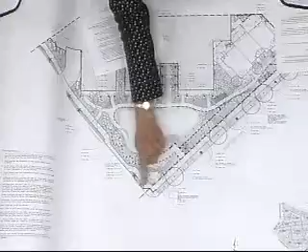I'll address a couple of the comments in my explanation. This is the new stone wall with the commemorative plaques along it, as you saw previously. We've taken off two plaques at the end. We've created two 18-inch high stone raised planters at either end and one at the corner, which allows this connection to slope up at a maximum 4.99%, so we don't need any handrails to connect. If someone wanted to cut across, they could, or they could come in and view the plaques from either side. We've put a Valencia orange in each one with star jasmine as ground cover underneath. In this one we just have the ground cover planting below. We can't have anything tall because transportation wants a 30-inch max viewing across there, but in the middle we have a location for a statue of St. Francis on a stone plinth.

So I think that covers number 2, number 4, number 5, and number 3 under landscaping. We have 2 trees instead of 1, which is the 2 orange trees. It seemed like it wanted to be balanced; just sticking one tree in the middle seemed forced. Number 3 is okay. So that's 2, 3, and 4 covered in that. Number 5 is addressed there too.

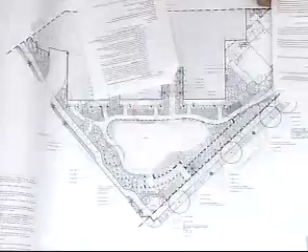We basically further refined the commemorative plaque area, added the statue, and had to get rid of 2 plaque areas, but we feel we can supplement that with text on the plaques when it goes to landmarks. The other thing I should mention is the paving in there is shown as flagstone, and the intent is to salvage flagstone from the demo of the St. Francis Gardens and put it in. We're not doing the concrete with grooves between anymore. This is noted in those little tiny sets on the hardscape sheets.

So that's number 5. Number 6, update the lighting plan to reflect the changes to the project. Go to the architectural sheets. If you look at the legend, I have two symbols for lights: this is a light pole, and this is a path or step light.

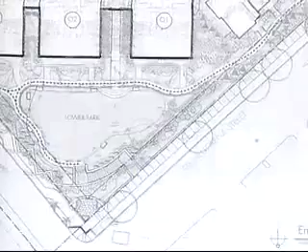If that light's shown on a step, it would be a step light. If it's shown on the path, it'd be a path light. And they're shown strewn across the major public walkways throughout the site. The intent is clear.

They're basically about 8 feet on center along each of the major pathway areas. They're not shown in these villa areas because those are shown on those particular drawings as lights in the sides of the planters. I can go to those sheets and pull those out if you like, but that's been addressed previously.

So you're showing really the main paths going all the way up. I see them here. You won't see them here because this is part of this building permit, but you'll see it along here, along this step here. We have pole lights along this internal street, lighting along this path all the way across here, all the way along here, up around here, and then along this playground area, down the stairs, the center stair.

I previously submitted the information two weeks ago. Do we still have that? You looked at it and liked it. There's the flush one that just...

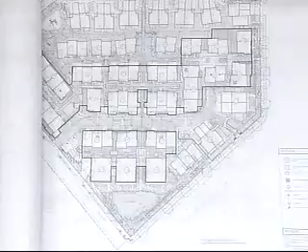I just had a quick question. Are there any pole lights at the entrances, or the major entrances to each part of the site? In other words, this would be one key point here. So you don't have any at this point? I'm not proposing any major street lights at the entrances. Not a street light, but say like a pedestrian lamp.

Let's not go into questions before the presentation is finished. Yeah, I'm just trying to understand the whole thing. There will be some other questions that we could ask after too.

There are some additional street lights shown for the off-site improvements that were required as part of our conditions of approval. I can't recall where those exactly are, but we can pull those drawings out.

Number 7, consider the addition of a bench in the former gazebo area. That was done last week, shown on the landscape plan. It's shown on our plan as well. You put it on your plan? I brought in your plan, so it's right here. So that's the bench.

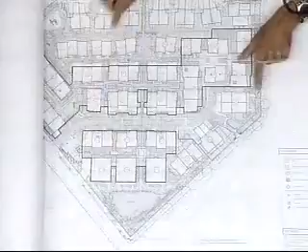Number 8, staff is to clarify the bus stop requirement condition. AMRA did clarify that and said that those shuttle stops needed to be covered. So we've shown a covered shuttle stop here at shuttle stop number 2, and a covered shuttle stop here, shuttle stop number 1. On the upper site, we incorporated this shuttle stop into the carport area. So we added a handicap spot, and we're making that an extra wide handicap spot that's covered with a bench and an area for wheelchair access for waiting for the shuttle. Do we have a design for the cover? Yes.

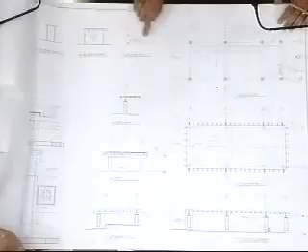The cover is just a simple trellis structure with a 6x6 post and 6x10 beams and a flat tongue-and-groove 2x6 roof with room for one bench and then a clear space for ADA. And then this is the extra width on this carport that you've seen before. That's the bench there.

On the landscaping, I'll let you address those, Katie. On the site improvement set, the plant list, all of the Stenocarpus trees, including the 5 on the street, have been increased to 24-inch box size.

Number 2, introduce low group plantings among the existing ground cover. We have shown that on those 2 sheets along Micheltorena as requested. However, I've spoken with someone at the Streets Committee who says he does not think that will be approved by Parks. They want a monoculture planting in all of the parkways now, and there's a list of about 11 plants that they will accept. The Cotoneaster ground cover that we have specified is on that list. But I've shown them anyway, so we'll take it to the Streets Committee and the Parks Department when they select the street tree, because they haven't done that yet for those 2 streets. At that time, they'll review it, and if they approve it, good, and if they don't, we'll just go back to the plain Cotoneaster.

And then the other one was to study the planting in the corner visitor area to be more historic in nature, and that's where we've added the citrus trees and the low star jasmine as a ground cover.

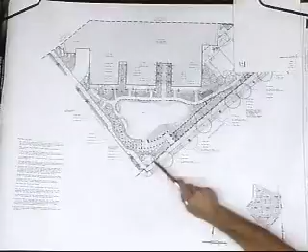So I heard that these planters are 18 inches. What was the height of this? The wall is 42 inches high. So it's 42 inches from here all the way around to here, and then that piece returns at 18 inches? Yes.

That question was asked. I had another question. Given that some of this work is in the front setback, is any of this work requiring modifications? Not that I'm aware of. It's considered county site work and not?

Site work. And what about the bus shelters? The bus shuttles are previously approved. Those locations are previously approved. Okay, so they don't need a modification either.

No. And did you have a design for the shelter, the smaller shelters that are up here? Did I miss it? Because I thought that was the one I showed, the smaller shelter, it was, and the other one was incorporated into the carport. Okay, got it.

No, that was it for my questions. Thanks, Clay. Gary?

Did you study the idea of maybe putting the statue up right outside of the setback? Irma called me at 2 o'clock today and told me the issue with the statue. Okay, fair enough. No. I'm more than happy to consider other options if the board strongly feels that we need a statue.

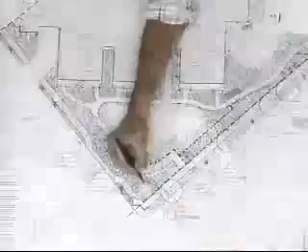And we can put it in an area that's not within the setback. We could put it just behind the main plaque, if you look at my site plan, that area is just outside the setback. That's the only area that's just outside the setback. I prefer the location we had it previously, but it's a 30-inch high statue that's a nod.

Okay. That's it. Keith? No questions. Okay, Clay, go ahead. Question for staff, just to refresh my memory and maybe the memories of other people.

What exactly is recorded as a motion or approval or condition of approval with regards to the statue? Sorry, I had it with me. That's right, okay, now. Oh, here it is.

The condition of approval reads: a commemorative display or area for the education of the public detailing the history of the St. Francis Hospital shall be integrated within the open space located at the corner of Micheltorena and Salsipuedes streets. All text for the display shall be written by a city qualified historian and approved by the HLC. Additionally, at least one of the art pieces from the former St. Francis Hospital shall be incorporated into the on-site display if available. The display shall include decorative elements from the building.

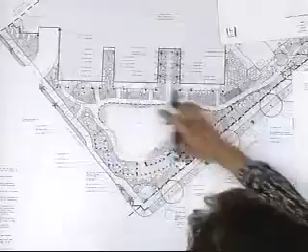Since we have the space here, if we could just get two benches with maybe something a little higher underneath, this is a great opportunity to create that conversational seating we've never been able to accomplish anywhere else. The second thing is if we could incorporate a tree wherever this seating is, then the person is encouraged to sit underneath shade.

If children are playing in the park or lawn area, I think people are more comfortable sitting on a bench underneath a tree, as opposed to being in a very voided area where the sun is on them at all times. So that's just a thought on looking at your tree plan with your benches - if you agree, that would bring it up to a much more enjoyable level for the people using it.

The last thing is the little accents in the ground cover. I see you've done that on Micheltorena, but it didn't show on the California Street plan, and that was probably a drafting error since that's left as is.

You only mentioned Micheltorena. I'd be happy to carry it up. In the minutes, it says Micheltorena and California. Oh, it sure does - okay, I misunderstood. I'd be happy to carry it up. Okay, that would be great. And that's all. Thank you.

I need to take this. Yep.

Okay, Paul? For me, I want to address - I think we've gone around this location for where this is, and I have to say that I am comfortable with where the proposal is right now.

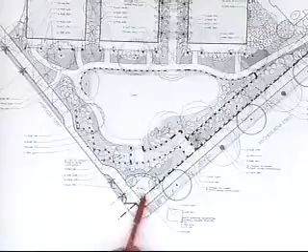So, any other comments before we open up to a motion? No, Chair. Carrie, I would just like to say that I'm really comfortable with the location of the memorial. I think this is a great site for it. I think it's an area that the public can use, as opposed to if it was someplace else, the public wouldn't feel as comfortable going up to it. Similar to the Red Lion, they've got that big area of a park there, but no one feels like they can go over there, yet it's for the public. So I think this is very inviting to the public, and I think that it will be enjoyed by the public.

I do like the idea of a statue. I think a statue would be nice in that area. I don't really care if it's in that spot, and I don't care about the size of it, whether it's a 36-inch one or something. But I think a nice little statue is a nod. I don't see it holding up this project though. I think that's ridiculous. I think it needs to move forward, and we need to finalize this and move it along. But yeah, a statue in the corner - it could be Nurse Ratched from One Flew Over the Cuckoo's Nest or something. I don't know, it just needs to be something there.

Could it be up in here somewhere? It could be. But, you know, I really think that this needs to move along.

So, if I'm right, essentially what you're saying is that the proposal is good to move along and give them final approval, and leave the comment for them to further their thoughts on the inclusion or not of an object in that realm - statue, image of a statue, whatever they decide - at another date and time. But you're essentially fine to move it on with this proposal without it, yeah?

Absolutely. Okay, so with that, you have a further comment, Carol? No, what I'd like to do is make a motion, and I think that this motion is going to fail, but I want it to go on record.

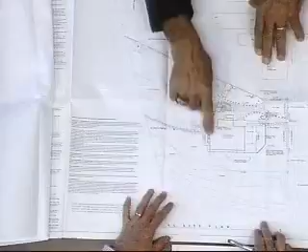We have the site plan here and the parking lot over in this area. What we'd like to do is expand the second floor of the kitchen, project it out about 9 feet, which would encompass an existing deck, over this area below. There's an existing deck and some storage below that. So if I'm right, you're talking about this area right here?

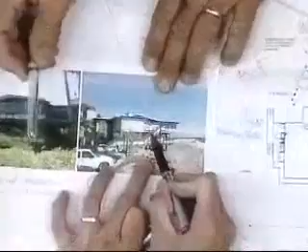Yes, right here. So you'd like to expand that elevation, or that wall of the building, out to this face? Yes. So that wall would continue all the way down to here? Right. And would it be a blank wall like that? It'd be a solid wall, yes. And then the stairs are in front of it - the stairs go in front of this wall coming across.

So the stairs would be giving it some relief. So what you'd like to do is this little cutout here. Yeah, is above. Yeah, yeah. Let's go to the second floor plan.

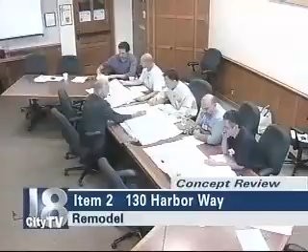We have the existing kitchen here, and so we'd be enclosing this portion. And then up above, the stairs still come down. This shades the area up above that's going to be enclosed. Okay. This is the upper level plan. So this would be enclosed here like that. Yeah, there's an existing deck there right now.

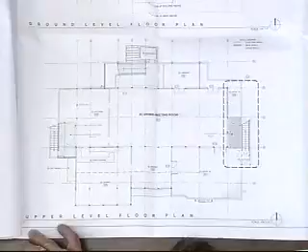I'm missing something here. This is north, the parking lot. This is the area here that's confusing me - this is the second phase that we'd like to ask for. There's an existing deck here. We'd like to expand the kitchen out to that point, and then the stairs come down here.

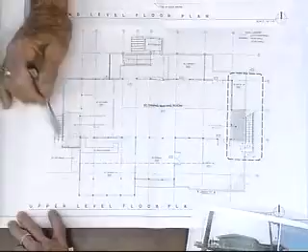So you're bringing the deck out a little farther? Well, the line of the existing deck would stay here, and that would be enclosed. And then these are the existing stairs. So that staircase will only go to the interior of the kitchen? That's correct, yeah.

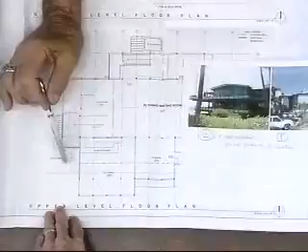This is a walkway they used to clean the windows when the club was first opened. It's a walkway right there, like a catwalk that you stand on, to clean the windows - some without a railing or anything. The new windows we put in, you can open to clean, but when the club was first built you weren't able to get outside to clean the windows. They were all fixed, and there was a catwalk going around there. So this is kind of the remainder of a catwalk.

So can that be removed now, since it's no longer needed? That could be removed, yeah.

Just going to open this up to the public to see if there's anyone that wants to comment. Just one letter of opposition from Ms. Paula Westbury. Thanks very much. Close that portion of it and bring it back to the board for questions.

And okay, the second item - what we'd like to do is move these existing stairs out so that we can get another access from the dining room. Right now you come out the dining room and there's an existing deck coming around like this that dead ends. When we get a large group in the dining room, the way to get out is here.

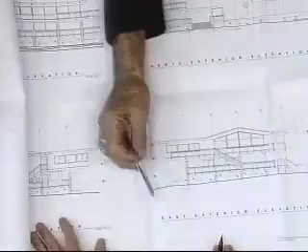So we'd like to get another exit out this way. Can I see what that would look like on the elevation? It would pretty much match these stairs over here. I guess this is not connected here. So it would be these stairs here. Basically we're just taking those stairs and moving them out 4 feet, so the deck up above can continue around.

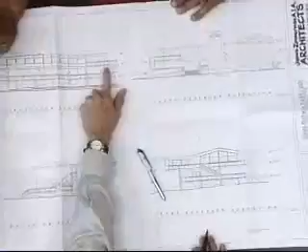So this deck is really here now? Yes. Right in here? Yes. So you're extending that out, okay. Right. And it would pretty much match the existing stairs that we have over here on the other end of the club.

Okay, and then this was where we would be asking for that catwalk to be removed right here. Yeah, we could remove that. And then this is that portion where you want to extend the building out this way to connect to this wall. So what's this line here now? That's the line of the existing kitchen, and then this would be the addition. So that line would go away then, if it was connected - it'd be all one wall. Okay, all right, let's bring it back to the board for questions.

Anyone questions? Okay, go ahead. Yeah, I've got a couple questions, only because I don't know this building as well as you do. When I'm looking at this, can we go to the floor plan?

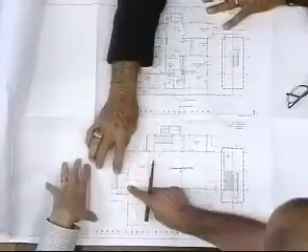So we're adding onto the kitchen here on the upper floor. Kitchen here, oh the kitchen there - we're adding onto the kitchen there. This is west, this is east, and this is the ocean. Correct. Okay good, and this is the parking lot out here. And then this is the other stair you're talking about, from the upper floor down, and then it comes down to here. Right.

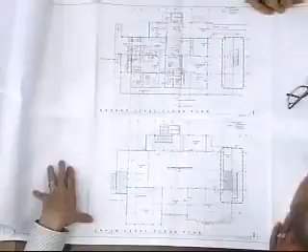Okay, and then if I turn the page, this portion is the existing deck with the new stairs on the east side. Right. Okay got it, yeah, this stairs here right now. Okay good, that makes sense. Okay, that was my question.

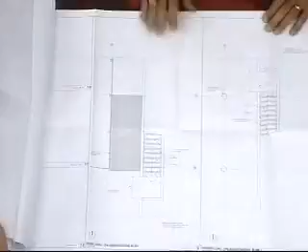Jim, have you sized this for the occupancy of the building already? Yes. And the fact that you are taking this away from an exit, maybe to come down here - that's not a problem, right? You have one exit down here and another here. No, this wasn't a required exit. Okay, so that will stay as is if it's kept. Right. Okay, so any other questions?

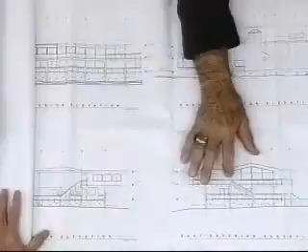Mr. Chair, one question. Keith: On the new stair on the east side, was the intent to have the guardrail detail match the panel detail elsewhere, or is it shown as rails now? That would match existing. So you're going to do it more like this?

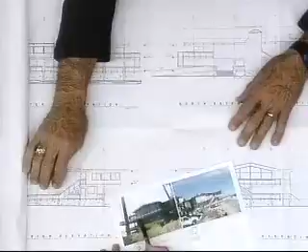Well, the east side doesn't show the rails coming down. But they actually do on that side. See the step in there? It doesn't have that white board. So are you going to match this side, or match the existing that was there? It will match the existing what's there now, not necessarily this side. Okay, good.

Okay, let's have some comments. Paul? Clay? Gary? No, I think it's simple enough there.

Keith: I guess my only comment would be questioning the different guardrail detail at that location on the eastern stair versus all the other guardrails around the exterior. Agree with that. We could look at that and see what would match better, whether we'd want to go with the design of the other guardrail or not. So we'll look into that and see.

I'd be inclined to follow up your comment with my own. When you look at that, I think you should look at this side. Whatever you do here in terms of this angle is probably what you'd want to do here. One of the things is if you keep the panels and those guardrails see-through, you get a horizontal feel visually from the bright panels. You can see in this photograph you've broken that horizontal here with this angled one. So whichever way you've studied it, there should be some cohesion between the two.

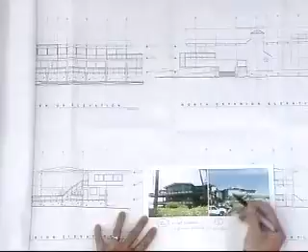Am I right that with this new stair coming down here, you don't have any new vertical supports? It's just coming straight out horizontally to support that step. It's cantilevering, yeah.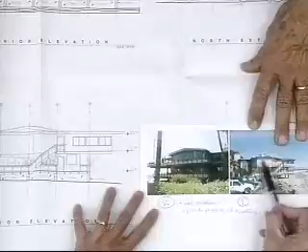If I could follow up on my comment, the one concern I have on the western side with that build out is the very thing I'm seeing right now with the existing western elevation — you get this expanse of white block, and I think that's probably one of the worst portions of the elevation of the yacht club. Bringing that wall out and increasing the size of this would make it worse. When you restudy this, it would be good to see if there's anything you can do to give it more of this type of styling that tends to lose the white block mass from the sunlight. That's a good point. Maybe put a cap on it.

So, Carol and Chris, do you guys have any comments you want to make? So if I'm reading the site plan proposal correctly, you're adding on coming toward the water, so there's more mass coming out. Yes, right.

Did you comment in your presentation about blocking views of people coming down the path, not the breakwater, but the sidewalk, because that's a spectacular view down the coast? Was there any consideration of what you're doing to address that? Yeah, when you walk down along the waterfront by Marina One where the fishing boats are stored in their slips, you're actually looking at the club, not directly from north to south.

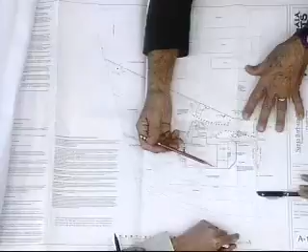In fact, the city harbor puts up a sign right here, do not enter. So this becomes a very congregated area for sunset. And what I'm really wanting to make sure is that this is a very popular sunset spot, is that what you're doing here, because what's spectacular about this is that long vista until you see the cliffs. There's no expansion in this direction.

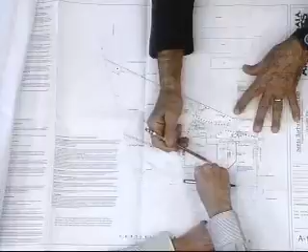So Jim, what's your answer to my question? No, this would not block any views to the west. So because this mass, whatever you're doing here, isn't happening there? Not doing anything there. Okay, it's all recessed back. Okay, good. Then I'm satisfied, you're looking right at the building, not at the... Okay, so there's no more protrusion than it already has. That's what you're saying. Okay, thank you very much.

Sure. Does anyone have any questions? Do either of you have any comments?

Okay, we can entertain a motion. Jim has agreed to look at that west elevation and to see what he can do to nullify the effects of the flat wall and to look at the guardrail styling.

I'd like to make a motion to continue this to the consent calendar for preliminary approval with the following comments, and there'll be 3 of them. One is to address the deck rail detailing and how it interacts with the current deck railing. The second is to look at the west elevation for some articulation to break up the large mass. And the third item was to look at removing the catwalks that are no longer being utilized.

Thank you, that'd be on the west side. On the west elevation, yeah, the catwalks on the west elevation that are no longer utilized. Okay, and we have a second?

We're asking for good comments because we're going to planning commission. Let me back up. We're going to try not to go to planning commission.

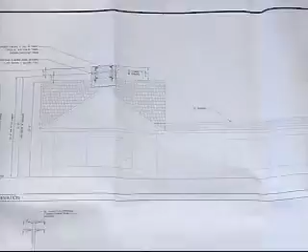I took these photos out on Sunday. This is existing, so we would be proposing to raise it 2 feet.

Is that the extent of the proposal? That's primarily the extent of the antennas. All of our equipment will be located inside the existing structure, and this would be the doorway to the inside of the structure where our equipment will be located.

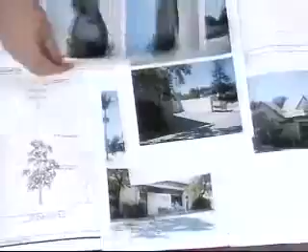We are also proposing new landscaping. We'll be taking this back to the original trash enclosure, and there's some wall we'll be taking down. We've got a landscape plan for landscaping the area back there. We're also adding landscaping to the front of the building, and I think that's best seen on the landscaping plan from the turn there.

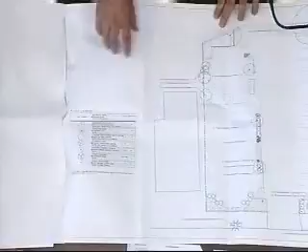So this is the area that's going to be significantly landscaped. We're proposing to take down this wall and add an 18-inch high wall there, with some ground cover, a pear tree, some bougainvillea, and this will be irrigated as well.

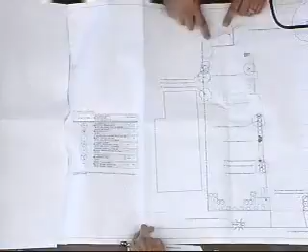This would be the trash enclosure here, the existing footprint of the trash enclosure. Originally this had been built out and they were using it as a storage shed, and we're going to take it back, reducing it to 18 inches high with an 18-inch landscape in front, and then this would be like a planter bed.

This would be a 6-inch curb. And what would this be? This is going to be concrete block, stucco. To what height? It's existing out there now - I believe it's 6 feet high.

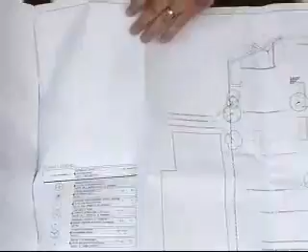Do you have an elevation of those doors, or detail? Is that it? Yes.

And that's existing, you say? This wall is existing, yes. There's a wall that extends out - those photos show it - that we'll be bringing down and creating an 18-inch wall for the landscaping area. And then this is in no way being increased in size? The actual square footage is not being increased, only the height. And then this is going to be refaced with Santa Barbara sandstone veneer.

Correct, veneer. It's a faux finish that allows for the transparency of the antennas for the connectivity.

We're also doing landscaping in the front. We were asked to do some landscaping that hangs over the walls to deter some graffiti, and some additional irrigation.

Okay, let's look at the site plan to see what the overall landscaping is right now. Is this the overall site plan? This is the overall site plan - we've got an overall that shows all the landscaping.

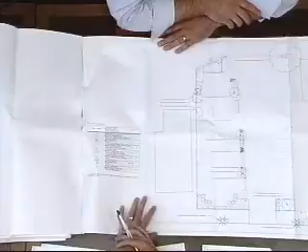So this is existing landscaping here. And this would be new? This is existing - right now they have a bricked-in patio, and we will be returning it back to a landscaped area. This is an existing tree here. This is existing parking? Existing parking.

So the landscaping that we will be adding is here, here, and here.

Questions on the board? Maybe - Chris, clarify that one more time with the planting, with what's existing and what's new.

Existing is dark, and the new will be the lighter shade here. So these underneath this existing are new? Underneath this Pyrus, underneath will be new that we're adding. I'm just trying to figure out the symbols here because they don't exactly match up.

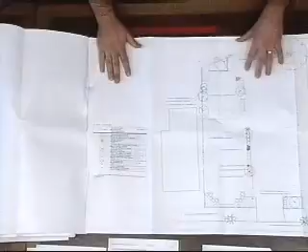Okay, that's my question.

Any other questions before we move on to comments? Okay, I'm going to read the minutes. Some of it may not pertain, but I'll read it also for the benefit of the board.

Continued indefinitely to the full board with the following comments. On the faux chimney, the board finds that a 3-foot height increase is still too tall and would prefer a 2-foot maximum height increase. The board continues to suggest moving the arrays into the corner to take advantage of the angle of the antenna array and the existing roof form.

The proposed stone is preferable. The proposed stone is acceptable because it matches the existing stone. However, if a total refacing of the veneer is proposed, a more regionally acceptable stone should be used, such as Santa Barbara sandstone. On the landscaping, document all existing significant landscaping on the property and in the right-of-ways, such as...

Existing street trees, existing plants and trees, and landscaping in the planters on both sides of the driveway. Both planters on either side of the driveway shall have landscape improvements. In the rear of the property, develop landscape and wall solutions which provides landscape screening and enhancement to the alley for the benefit of residential neighbors, including the trash and recycling containment.

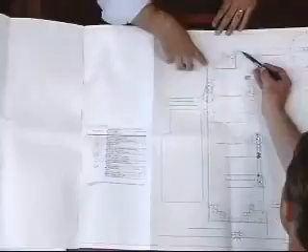I think that would be my comment, to make that a little more graceful there. Perhaps, I don't know if this is curb, I assume, it just kind of sticks out. This is existing wall. This will be the 18-inch wall that we're proposing. Yeah, so I guess my comment would be I would recommend providing some shape there to that bed, and bring the planting in accordingly, or over accordingly, I suppose. That's all for my comments.

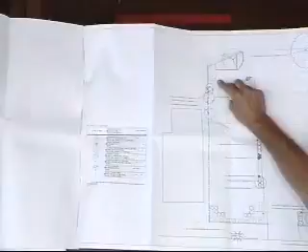Thanks, Chris. Paul? Yep, Clay? I do, no, just a question. Okay, come on. Just this trash enclosure is staying where it is, right? So the dash lines aren't really suggesting it's being removed. No, it's staying where it is. So it should be solid. It was dashed because it had a roof enclosure over the top of it. Okay, got it. So this has been removed.

So this portion of wall here is the trash enclosure, which stays. This portion of wall that comes across here and across here is actually dropping down. Correct. Is that correct? Correct. And then this is the line of the building? This is the line of the building. Okay.

And Chris, did you look to see about plantings that drape over the front wall, and are we meeting those? Yeah, in the very front of the building, the lantana will cascade. However, on the right side, as you're facing the building, over here, I'm not seeing any cascading plants there. I mean, the bougainvillea, this is existing, right? That's right, to remain. And what are these? Those are additional bougainvillea, bigger ones. So yeah, those will certainly overtake that wall.

And then the reason was that it used to be faced in stone, and then they plastered it without it. It used to be brick, right? Yeah, no, it used to be faced in the stone. Flagstone.

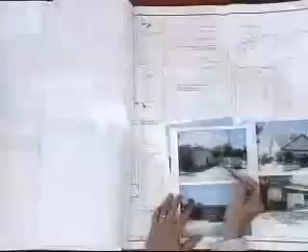I think that at the very least, the rear of this building should be repainted, along with the improvements you're doing in the back, because there are some images showing stuff that has happened in the back, and with all this cleaning up that you're doing, I think that area should be redone.

And then I think the gates to the trash enclosure could have a little better design with them. Maybe it should have a frame all around, instead of just vertical boarding, because vertical boarding looks to me like just a piece of fence you're using as a doorway, as opposed to a real gate designed to be there. So I think the gate needs a little bit of design. That's my comments for now.

I'd like to hear what the others have to say. Any other comments?

I have a couple of planting comments. I noticed that a lot of what you're proposing to plant are 1-gallons, and I think being that this is sort of a commercial zone, I'd encourage you to plant 5-gallon plants as much as possible, especially for the lantana you're proposing to creep over the wall. I just think 1-gallons have a much higher mortality rate in a setting like that.

And then also on that trash enclosure, I'd encourage you to add perhaps some sort of creeping vine on the back side of it to provide a little more green screen, such as Boston ivy or creeping fig. That would be, I can show you, on the wall facing the alley, somewhere in here. Yeah, and that'll also creep around the side, which will help.

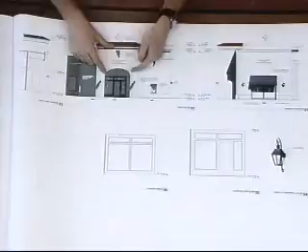So there's two things at work with this elevation. This existing portico that we're working with, we're furring it out and beefing it up, but that was one constraint. The second was an existing glazed opening. Like we've seen before, we had conditions where the glazing actually went too far, where we didn't have a place for this portico to return, so we ended up pushing the glazing over as far as we could without making it too small.

We're already under, per the guidelines, the amount of glazing they would like to see at this storefront, which we briefly spoke about last time. And just for retail purposes, we want as much glazing as possible. So we have these two constraints that we worked as hard as we could to get without making that opening smaller. So we did center the entry door.

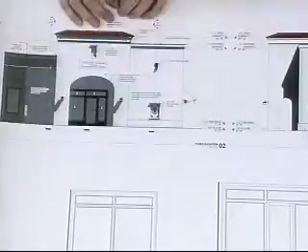There's a single entry door centered on the arch. So as you can see, one side has a little more wall return than the other. That's where we landed with that, and we think it's successful. It's really just in this moment in elevation where you get that snapshot of it's not perfectly centered on the opening, but for all things considered, we feel it works.

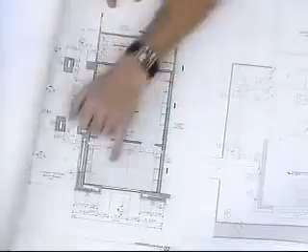The next was the parking lot entry to be recessed similar to the entry, which we went and did. The question had more to do with how deep this opening was. The prior plans showed glazing. You can see here we furred out substantially, so these openings now look very thick. Before, we didn't have that furring, so the glazing appeared to be flush with the surface of the building. This one was already recessed deeply, so we recessed this as deep as possible.

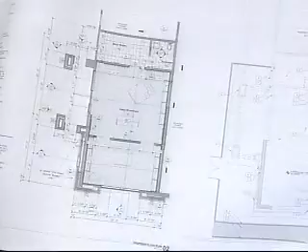The next comment was just bringing the plans up to speed, which we have done. The whole set now corresponds with the elevations and would correspond with the perspective. And then planting was the other comment. We previously only had potted plants per the La Cumbre Plaza's existing landscape plan, but we did find an opportunity to actually put 2 vine pockets flanking the decorative grille.

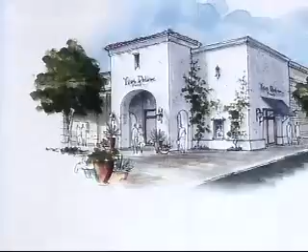Let's look at our perspective. So you can see one of the members commented on perhaps providing vine pockets along the arch and growing up, and I think at the end you said you wouldn't think that was the best spot, and neither did we. We furred this out even further, so we were already well into the pedestrian way, and we wanted to keep that hardscape. So here we just provided vine pockets to grow trumpet vines, train them up this wall, which happened to be a fairly blank wall, and this is a way to add color to that as well. And I believe that was all the comments.

So we made a couple more refinements to the design. We developed this tile cap a little further.

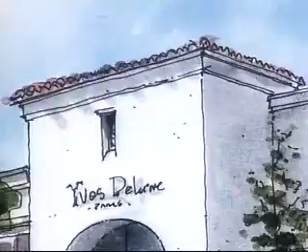Originally we had just a simple cap detail on a flat parapet, and instead we created sort of a mini mansard. We did this type of condition where we actually created a slight slope and have 3 tile deep. We found that from perspective you could appreciate a little more shadow, a little more interest from layering a few tiles.

So that's one thing. And from previously being here, we thickened all of these archways even a little more. I think we landed at just over 2 feet, 2 and change. So we beefed up everything even a little more. Out here as well, we furred out even farther, and this wall as well, to make nice deep openings where we were proposing these windows.

And the other landscape you see is all existing. There's a tree just off this corner of the storefront, and this one is just off center from our proposed portico.

Here we're proposing, we don't have the exact one called out yet, but we're looking for a window grill similar to the Chamber of Commerce building. So we're looking to do this here and here, this one about half the size of that.

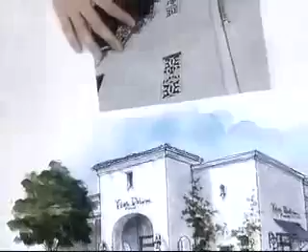This is a little decorative vent, kind of an outie, similar to the one on East Beach Bathhouse. In the gable, they have these little vent details that have these scalloped rounds, and it's an outie rather than an innie, which we kind of liked. It casts shadow and just kind of adds a nice detail up above there.

For lanterns, we have Bevolo, a French Rodin, per the client's request. We have a Sunbrella awning - this is Yves' corporate colors, this medium to dark charcoal gray. We're going with white stucco, smooth trowel finish, and then the storefront openings are wood systems painted charcoal gray to match.

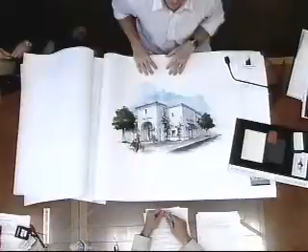So I believe that's it. Ed, am I missing anything? If not, we're open to comment and question. Do you have a reflected ceiling plan? Yes, we do.

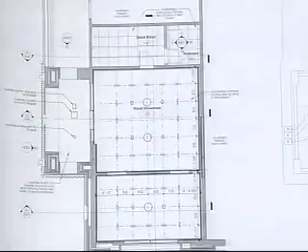So currently inside, you can see where we fattened up the opening. Inside, we left the existing lighting, existing mechanical access and whatnot. So we're going to paint to match all new plaster, but left the existing ceiling. So it's just one light? Yes, off center of the street. Can light, four-inch recess. This is stucco right now? Yes, for the ceiling.

Okay, let's open it up to questions from the board. Oh, first, sorry, public comment - anyone in public would like to comment? Seeing no one, we'll close that portion and bring it back to staff. Just one public comment letter in opposition from Ms. Paula Westbury. Thank you very much.

Bring it back to the board for questions, starting with Chris on the west side. Quick question - the gray used for the awning, is that used anywhere else on the front, or did I miss something? The gray is the awning material, and then gray to match is the painted window system on both storefronts.

That's all. Paul? Thank you, Mr. Chair. A comment - you brought up the reflected ceiling plan and some kind of light. It seems to be an unresolved missed opportunity. If you can maybe get another lantern to match your other ones and hang it from 2 chains, you know, run the power source from one, or somehow do a little bit more, because what you have there is off balance and might not work too well.

We actually do have those details here now that we can look at - above the window grill, that right there. So that's what's drawn here? Let's see, which one are we looking at - the lower level window grill, here on 2, is it here? We don't have the full details, just the section and large section. We haven't detailed them fully, but we do have the section which is virtually built in, it's just not dimensioned. If the other architects can take a look at detail 06 on sheet A3.0, we'd appreciate a little bit of feedback on the height of that canopy for the window grill.

The height of the canopy here, just the swoop of that. Yeah, I was thinking it needs to be a little taller, more verticalness. I was thinking it was going to be 18 inches tall.

Is it cast stone? No, this is all plaster detail. Just the way it's rendered on section. I can't read it.

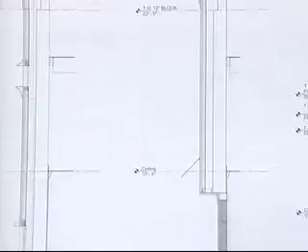And is this supposed to be the ogee, or? No, this is on elevation the decorative window grill. Oh, I'm sorry, yes, this is the little ogee. This is above the portico arch.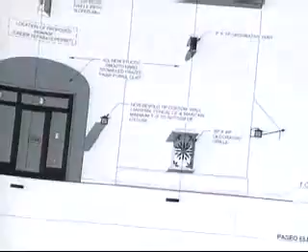Okay, let's just go to that image. So that's the one you were staring at. That was the one section. I guess what we need together with these is this in more of a larger view, because I think your intent is correct. If you look at the perspective, the intent is correct, but the information on the plans isn't enough to give us the kind of detailing, the softness, that kind of thing. So if you could get that for us in the larger scale. Still, okay, yeah sure, that's it?

Okay, Clay, questions? I don't have any questions. And/or comments? We're going to do both? Yeah, let's do both. I think we're moving along pretty quickly here.

My comment, I agree with Paul's comment on doing some sort of lighting in that entry portico. I think it really needs to have a nice, well-appointed chandelier supported, something indicative of the architecture you're doing. A minor thing, not a big deal, but these kind of little lighting blocks aren't the same as what you're speccing. Not a big issue for me, but...

If we can go to the front elevation. Is this the adjacent space, or where is the break? I'm having a hard time understanding. This is what I'm looking at, the lease line. Okay, we have... this is one of those odd conditions, is that overhang?

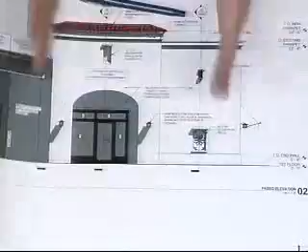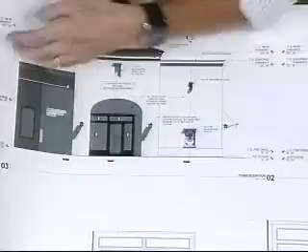Yeah, this continuing is an existing overhang that is to remain, but our lease line is several feet over. So what we're proposing is sort of creating an implied lease line here, but going ahead and plastering all the way underneath the canopy to where the storefront really is. It's in hopes that when this canopy is removed, this work is already done, and then a simple parapet at that time would be proposed. When that happens, if it happens, we don't know, so we have to work around that. So for now, we're matching our new stucco to the lease line.

There's an existing photo, so this will become white here. Yes, that will become white. It's a little, but this will be gray. This will be the existing gray stuff. Yeah, so you can see even...

It's a tricky condition we're working with. So you can see this is actually our lease line, this is our portico here. Right, right, this is our adjacent neighbor. So this canopy comes all the way to our portico, and we're furring out and really letting the canopy butt into our portico. But underneath, rather than leaving this as is, we're just plastering it to match the rest.

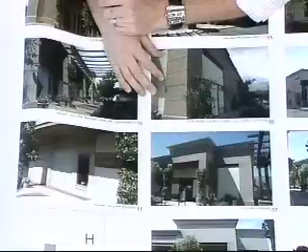And are you furring it out? Is this face being furred out like the other side? No, no, just enough to get a coat of plaster, but... let's see.

This is that thing, right? Canopy above, that's the canopy. So there's our lease line right here.

So no, there'll be, I think, is there a proposed channel? Will there be a channel between the two? There's going to be a channel between the two storefronts, but that'll be up to the underside of the canopy.

But this comes right into that, flush. Well, that was another comment Paul had last time. We provided that elevation, this elevation, which we didn't have last time, showing that condition.

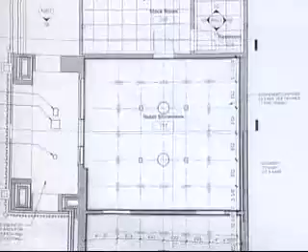So this is the canopy in section, and we furred out as far as we thought we could, and so this canopy will be sliced. It currently returns, but we want to slice it, and there's just a little nub of about 4 inches left over that we'll clean up.

We looked at it—more often than not, we're asked to return these moldings, but I feel like they've been unsuccessful for the most part. Touring State Street, I felt the more successful ones were when they really were sliced, unless they were too large. In this case, it's so small we just decided to let the molding on the canopy end in a slice.

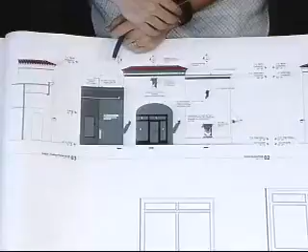I'd like some of the other board members to comment on that. I think it's kind of unfortunate to have this remain, but I think the alternative of cutting it off and looking at the end of that thing is worse. There's no easy answer—this might be the lesser of two evils.

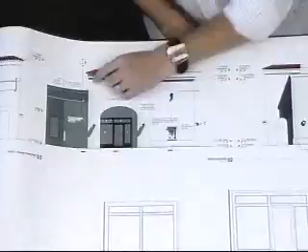The other part I'm kind of struggling with is the fact that our lease line's here, but this thing comes over. It's part of the old thing, and there's no real solution. Eventually something's going to happen here, but is that going to be in 5 months or 5 years? So maybe some other people can comment on that.

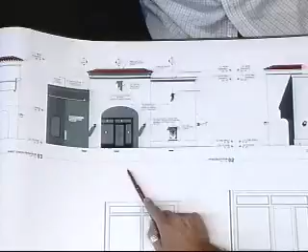My last comment has to do with the front entry, and I'm still struggling when I look at it like this. I just really want to see something centered. You've got this balanced here, this thing centered, but then the door system isn't centered at all. I don't know if you put double doors centered with maybe an arched top, and let that be a display window, some way of articulating that storefront so it's really clear. We've got a single door with side light, and then a larger side light with transoms, and for me it's just not right—I think there's something else that could happen there. I'm on the fence with it.

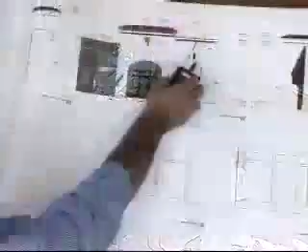I'd have to agree with Clay on this—your building does look lopsided to me. As far as the return goes, we're supposed to be talking about individual little buildings, and the lease line is here, and to cut the building here seems lopsided to me. I would think this parapet would need to continue on out at this height, and this little section would be part of this building right there. Looking at it from this elevation, it looks a little lopsided. It would help by plastering this and leaving this on top of it. To me, that's not a cohesive project—it doesn't blend in with next door, and it doesn't blend in with this one. So for me, I would like to see the canopy removed and the parapet height come in as this one, so this looks like its own structure, and that's kind of how I see it.

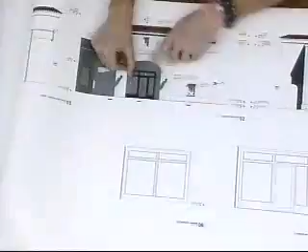I also agree with the storefront windows—they still don't look centered to me. It looks like you should be able to bring it over a little bit. I don't know what that structural wall is, or if that's a problem. It might be something there—this is shear up to this point, so the options are reducing glazing from here to center it, or finding something else that draws your eye to a stronger center. But that's why we're off center—it's shear up to that point.

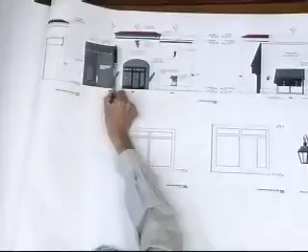This particular item is a difficult one. I think if you want the feeling that Yves Delorme is actually bigger than it ending here, you have to take this portion and go out here. But if you're happy to say Yves Delorme is this, then when you refinish this, it needs to go back to that color and make that building just end there. I can live with this little piece here because I know that's not final, that at some point it's going to change.

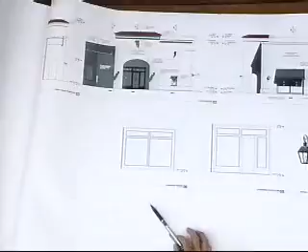I'm looking at the option for you, and I think I would rather see that come back and cut cleanly instead of half and half. I agree with the others, you have to bring the details for this, larger scale, bigger in the front so we could actually see the curves and everything form.

That's about it for me. So any other comments? Can we move on to a motion? Yeah, looks like it. Okay, we will entertain a motion.

So we'll do indefinite continuance back to full board with the following comments. Nobody really commented on the color palette, so I'll just go ahead and say that the color palette is approved as submitted.

Study the entry storefront door for a more centered and complementary resolution. Come back with details for the display cage, or architectural detailing, say a window grill, and the faux window details.

Study options for dealing with the adjacent space to the left, east, and how to resolve the condition with the existing parapet. Was there some landscaping? The one landscape comment was the board appreciates the inclusion of the vine pockets, but would encourage a continuous planter along the wall where the vine pockets are located.